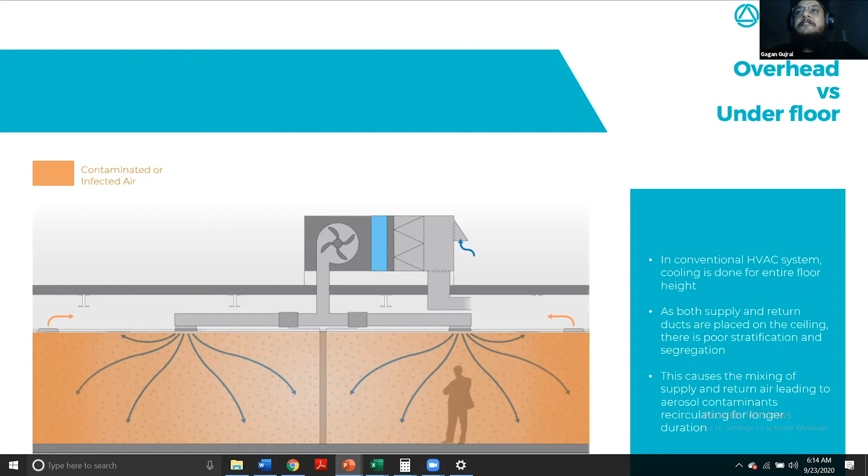And the other drawback is that after spreading, it's going to stay in the office air for much longer durations. So this is the problem with the current systems. What we are proposing right now is an absolutely underfloor services system, which can be brought right to your workstations, where the air can be tapped in from the workstations, and the exhaust happens at a different height, at a different level from where the fresh air is thrown.

So this is a chart. We have tested the product for 15 days in BCA Skylab, which is a government testing lab in Singapore, and we have seen the results, which were fascinating. So this chart depicts how much fresh air is stratified within the same volume compared to the earlier systems.

So within the human habitation level, the heights at which humans use the workplaces, there's absolutely clean air to be seen inside the office, and all the contamination happens closer to the return air ducts, which are seen above. So that was a good win in terms of air stratification.

And mind you, ASHRAE and WHO's primary recommendation is air dilution as well as air circulation, air directional flow within the same office space. They have these published on their respective websites also. If somebody wants to check, I could send them the links.

So earlier we used to do a complete office, and we used to think of an office as a complete floor plan. If you've talked to leasing managers and leasing heads of the IPCs, and if you've spoken to the global facility heads of the great companies, they always talk about the number of workstations. How many workstations am I gonna get? How many seats am I gonna get at the end of the day? So there has to be a change in perspective. We are not trying to change the density of the whole area, but we are trying to change the perspective.

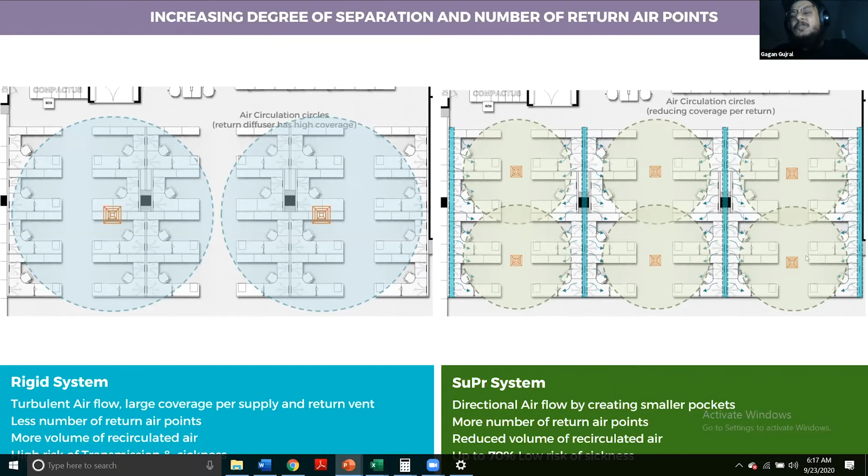This is how a typical section of our zone looks. So we have an aisle-based system. We divide a 1,000-seater office into more than 50 zones, each zone of 20 workstations or 20 employees, where people can get their fresh air from the desk itself. And for personal comfort, you could control your own desk, the fan speed, the directional movement, whether you want it on your torso or on your body.

And the same could be directed to an exhaust immediately without giving the air the flexibility to disperse or run from one corner of the office to the other, like it happens in conventional air conditioning systems currently. So this was a small design workshop which we did for one of the properties for Siemens fit outs, and this came out to be very interesting.

So this is a cycle which has been created. There was a pre-COVID scenario for everyone. Then during COVID, people have modified their office systems. Most of the world is actually doing the most idiotic thing of making people sit in alternate desks, so that a distancing of 6 feet is maintained, and at a lesser density you can operate the same office. And it's actually funny to notice that.

And then there is a post-COVID scenario, whether people are going to change their workplace strategy once the COVID scare is over. And once one of the true workplace strategies takes the test of time, stays there and is implemented by the majors in the industry, whether we are going to go back to the pre-COVID stage or whether there will be an interruption in the cycle at the third stage itself.

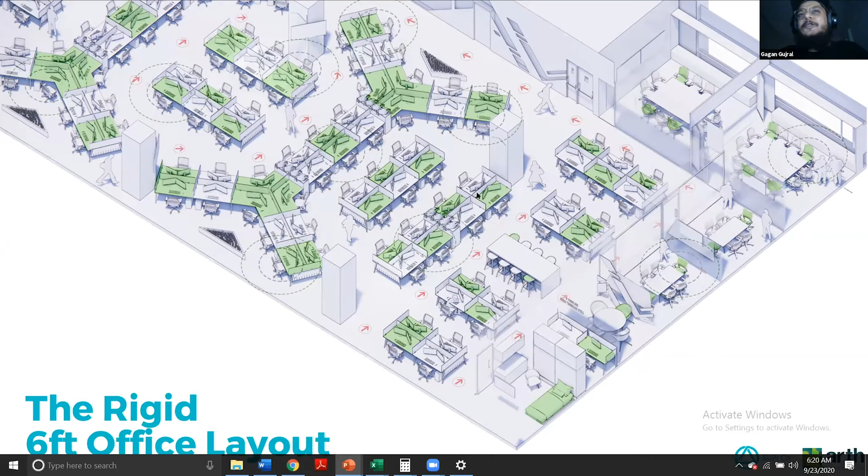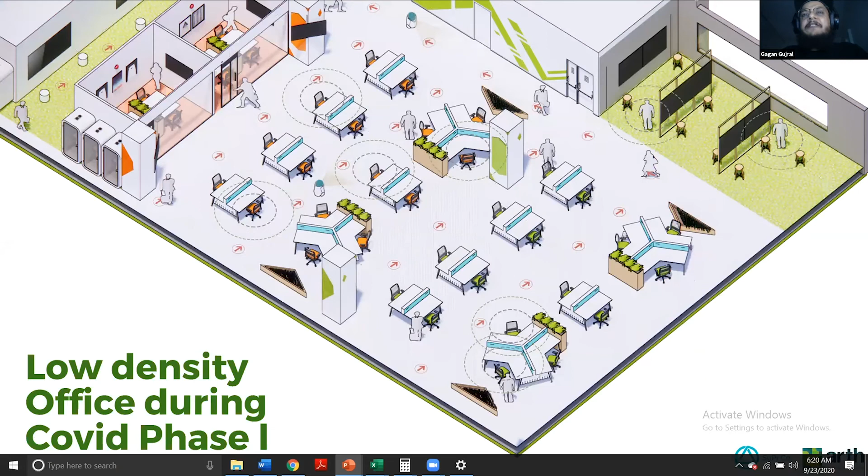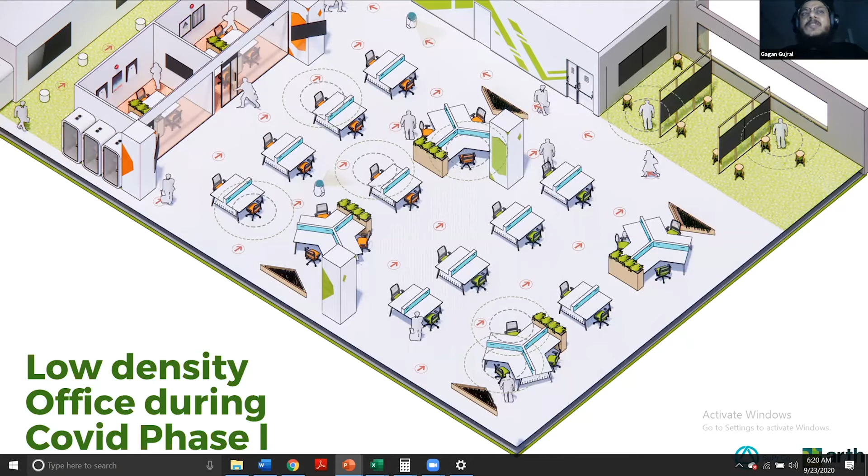Then what we did was, because there was an underfloor air distribution system, we had an absolute flexible way of pushing the desks from one place to another, reconfiguring a new kind of layout, reconfiguring a new kind of density. So this layout was created by keeping some of the assets in the attic stock and reusing the same assets which were used in pre-COVID times to arrive at a very safe scenario where it gave space, ventilation, good amount of aisles, and distance, and you could achieve all the government norms, all the safety norms required during those times.

Now once the scare is over, people are returning back to office. Using the same amount of assets which we had kept in the attic stock, we have created a medium density office. In this medium density office, a person sitting sideways and opposite is at 6 feet, but there's only a planter bed partition in between. There is no actual physical distance given between two workstations.

So we could increase the efficiency of the workplace by another 25-30%. Earlier it was very low, originally around 30% of the total compared to pre-COVID times. In this, we could achieve a density of somewhere close to 55-60% of the whole office space.

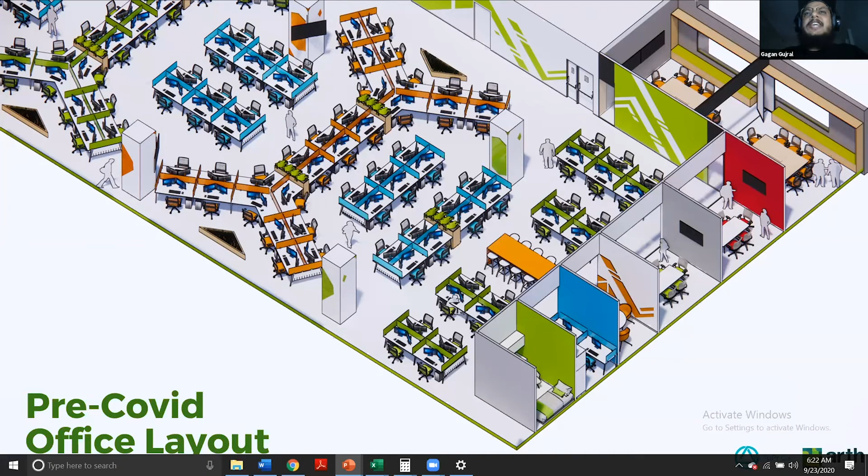And in case we return back to high density offices after Corona is done, we can again bring back the same assets which have been reutilized in some of the other areas and facilities, and increase the density if that demand be. So what I'm trying to say is, nobody knows exactly what workplace strategy is going to work going forward, and how many phases it will be revised. I think there'll be a few strategies which will stand the test of time and which most people will implement.

But our solution, our model, is future ready, capable of adapting any of those workplace strategies which, at a company level, a global level, a city level, or as a requirement level, you want to execute or implement at your facility in one of your workplaces. So all these products are DFMA based. We follow a principle of DFMA, which is design for manufacturing and assembly.

So we can easily, over a weekend, create meeting rooms, disperse the partitions, take again all the services from the bottom, and make a completely new layout, a completely fresh looking office in terms of layout over a weekend. We do this from Friday night to Monday morning. We give you the office back on Monday mornings.

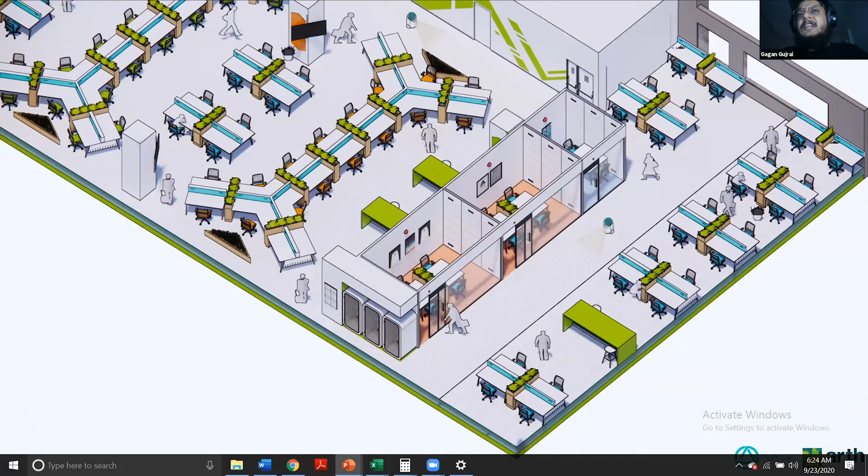You can create your phone booths, you can create other spaces within the same areas over a weekend. This is what the whole ideology of DFMA, design for manufacturing assembly, does to our systems. This is how we take off the tiles from the floor and take all the services, tap into wherever required, and create a new configuration within a couple of days.

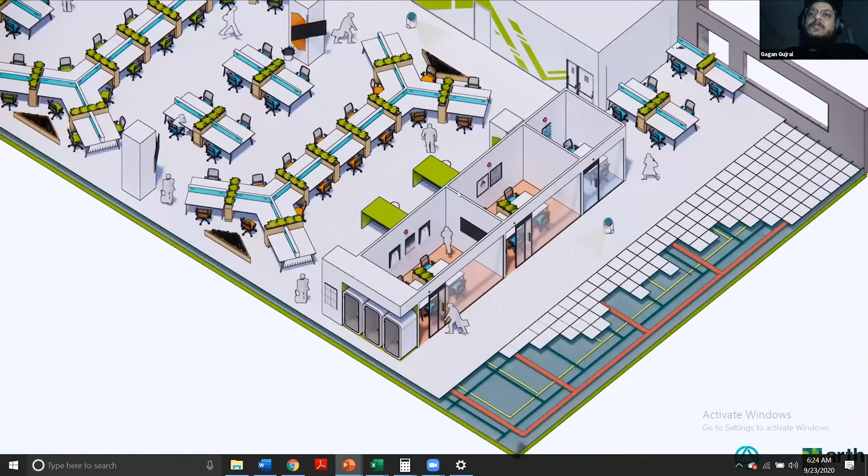With the help of technology, what we are doing is integrating our desk system. If I take you to a desk photograph, we have a diffuser system which comes on top. These are table-based diffusers, as well as diffuser systems which have privacy separators, placed on the workstations. We have placed a sensor on top of the desk. If somebody walks away from the desk, the diffuser automatically closes, and the same signal is passed on to the higher side of the air conditioning system, whether it's an AHU or an FCU, and the fan starts rotating at a lesser speed.

So you start saving energy on day one, which is one of the imperatives driving us to push this solution to the workplaces.

Apart from that, we have a live dashboard running of the current conditions. Right now Generation Z loves data. They like to know how companies like Fitbit and Netflix operate on how much data you can give to a particular customer about himself and his activities. So the same system can be run in the form of an app. We're also collaborating with Cozie on a Fitbit app, and collaborating with Cozie on an iOS app. So on any kind of device, you could have live data of your particular workstation and its ambient conditions.

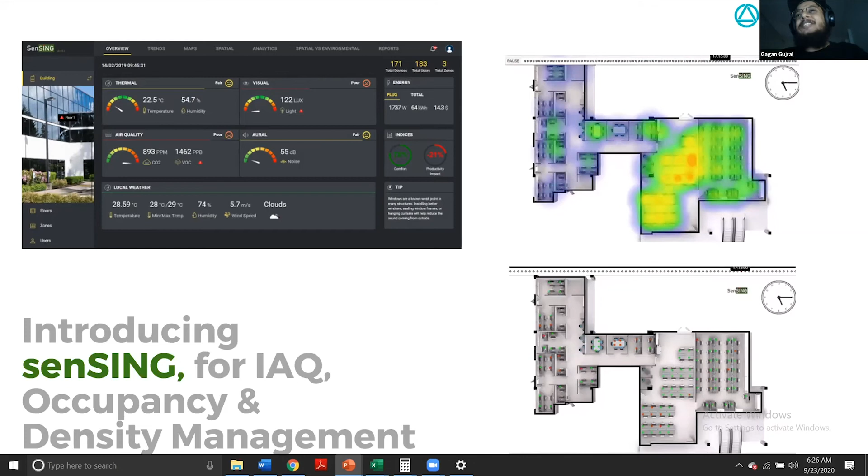This might also help you in choosing a hot desking workstation once you enter the premises. You might know what temperature you want to be at, whether you need sunlight or not, how much noise level you want, whether you want music running in the background or not. You can select all those parameters at the entrance, and the platform itself will suggest the right recommended seats inside the whole office, inside the sea of workstations, and the best spaces where you can sit for that amount of time and increase your productivity.

Because of such technology, we're trying to introduce a lot of biophilia into the design. We integrate a lot of plants, particularly moss-based plants, which convert CO2 into oxygen to improve the indoor air quality.

So now, how do we keep people and planet in mind? Just the last couple of minutes I'm going to take. For the people, what are the benefits? It's personal ventilation for each and every person, leading to personal comfort. You can control it. The biggest problem earlier was two people sitting under air conditioning, one feeling hot and the other feeling cold at the same time, and that used to be a funny situation the admins could not manage. So I think we have found a problem, and we have found a solution to that problem where personal ventilation could lead to personal comfort.

You can create micro zones where you could have your own air bubble around you of your own air conditioning, which results in a bettered and monitored indoor air quality within the same zone. Therefore, there are less sick days, less proneness to pandemics, less proneness to other viruses, and you have an 80% increase in employee productivity just because of personal ventilation and personal comfort.

And these are among the top recommendations by most of the top agencies throughout the world.

Now, when we come to the planet, let's look at what amount of dent we're talking about, what amount of effect we're talking about. The US market in 2016 was $10.74 billion, growing at 3.5%, as I told you. The average lifespan is 3 to 7 years of a fit out. But within the same fit out, the furniture churn rate is 550%. That means every piece of furniture is replaced 5.5 times during the lifespan of a fit out, whether that's in the form of refurbishment, replacement, change in styles, or change in technology of the furniture.